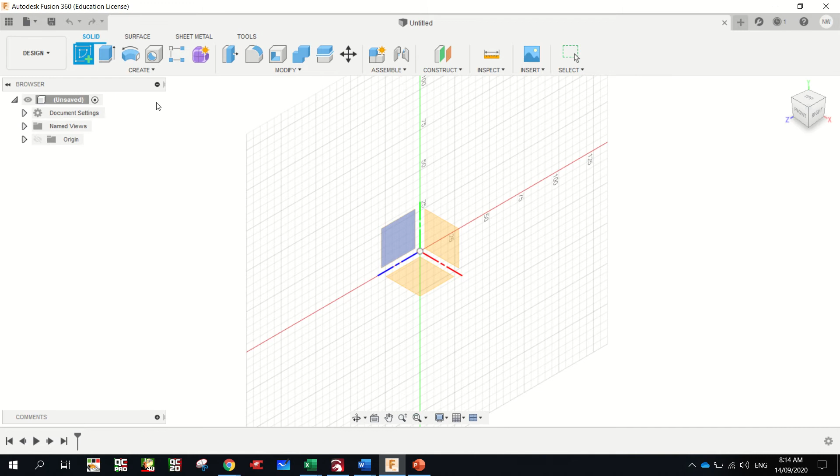So create sketch, we're going to draw it from the front view and draw the long piece first with the rectangle tool. So I've clicked it, click one point, just move your mouse, do not click and drag, and we're going to type in the dimensions. The highlighted one there says 26, but it's really 40, tab 650, enter. Okay, E on your keyboard. Just going to zoom out slightly to see this arrow and drag that out, and the thickness of our timber is 19 millimeters. Okay.

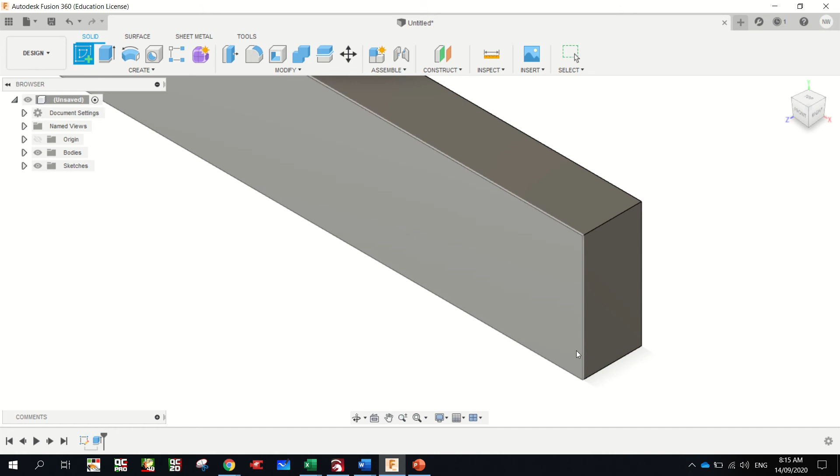Alright, now we're going to draw our finger joints on the ends. Just going to zoom in there. Now I'm using a scroll wheel on my mouse. If you have one, do that. If not, there's a zoom feature down here. Okay. So, sketch. This face here. Rectangle. Go up, and we're going up 10, tab 19, enter. Okay, E, and we'll drag that one off that way.

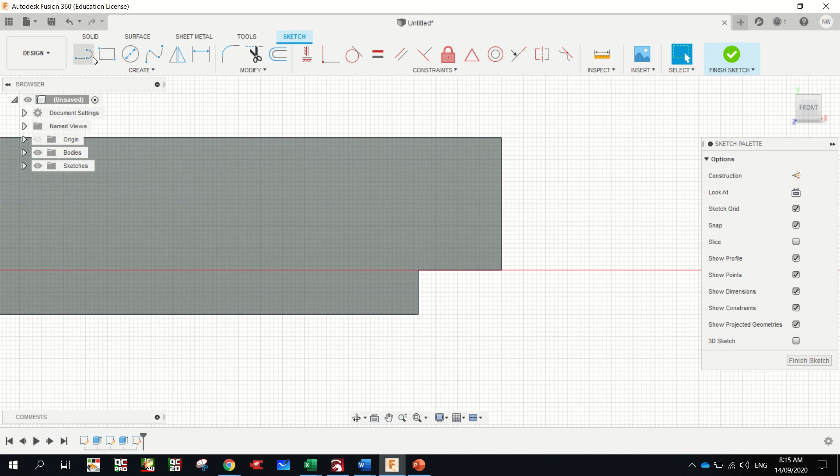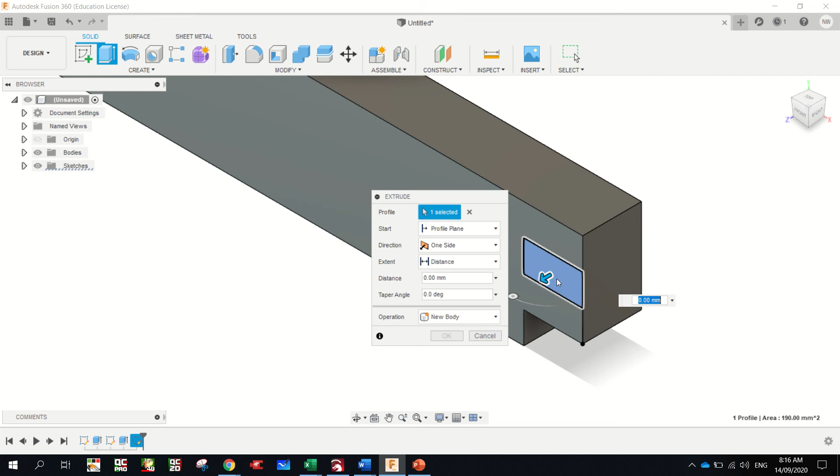Sketch this panel here. I'm just going to draw a line up here, 19, enter. Oops, not 19, sorry. Line up here, 10, enter. And I'll start drawing my rectangle from there. So I'm going to go up 10, tab 19, enter, extrude. So I selected it and then hit E, drag that back that way. There's the finger joints done already. Okay, same down this end.

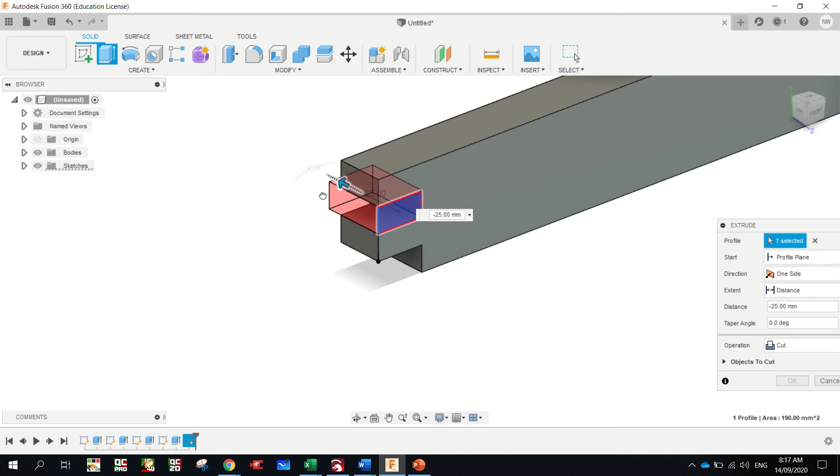Sketch this face here. I'm just going to zoom in a bit. Rectangle 10, tab 19, enter, select it, click E. Just going to spin the screen. You can just move that box out of the way, grab the arrow, drag back, enter. Sketch on that face there, line from the end point up 10, enter, rectangle from that point there, click, move that way up 10, tab across 19, enter, select it, click E, grab the arrow, move back, enter.

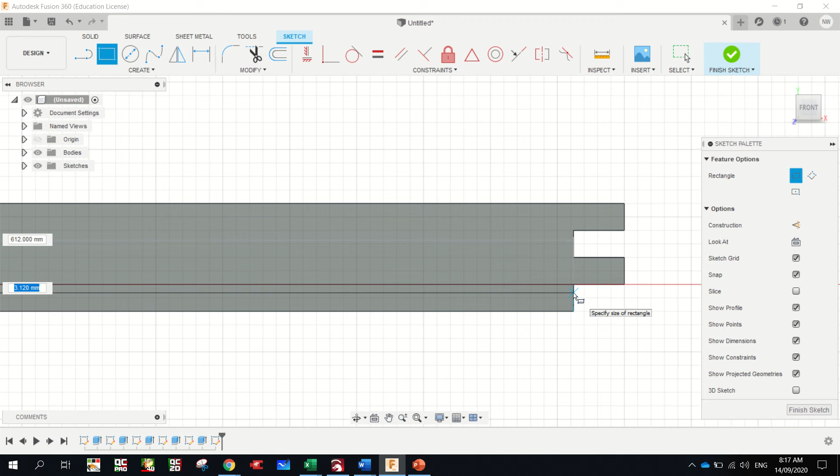Okay. The one thing that's missing here is our groove, so we'll draw that in. Sketch this face here. Now we're going to draw it from this point here. I'm going to zoom out. I'm going to go to that point there. So it's 612 by 4 millimeters. Enter. Select it, click E, spin your drawing, zoom out, grab the arrow, and it's 10 mil deep. Enter. Okay, that's that one piece done.

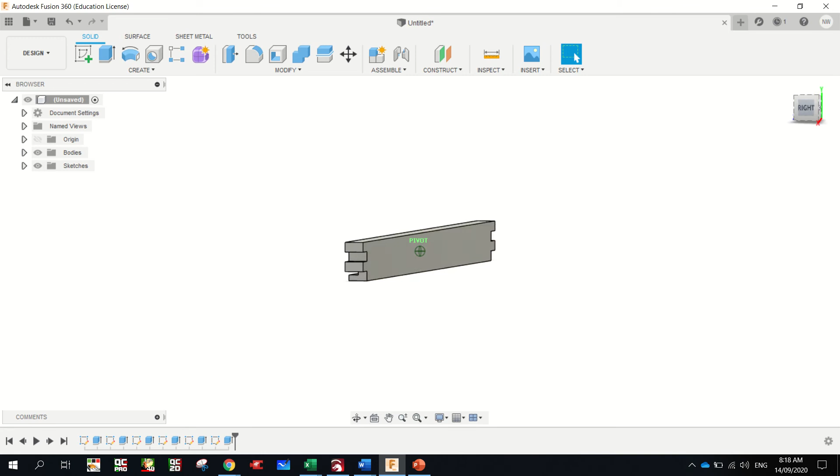Now you don't have to draw that again, we can copy it and mirror it. So to do that, right click. Actually, we don't have to do that. We can just select the whole thing. I believe it's in modify. Maybe not, maybe create. Here we go, mirror.

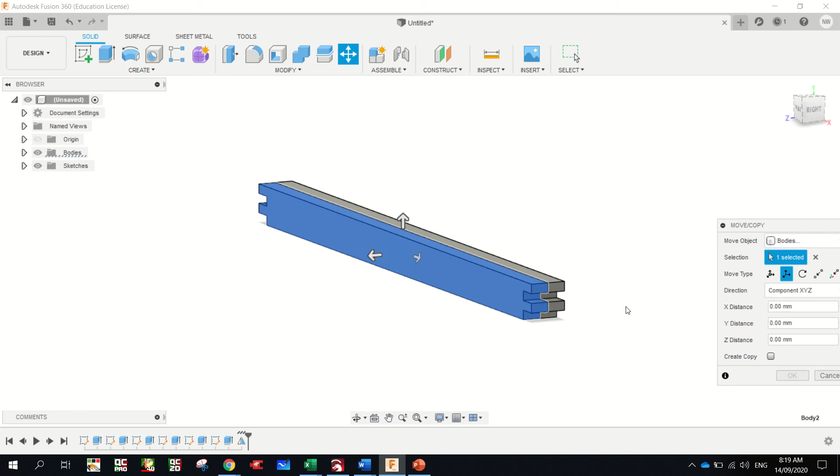Faces, we'll go bodies, this body, object selected, the mirror plane, select this one, click OK, right click, move copy, bodies, this one, we're just going to translate, which means to slide across. You'll learn that in maths last year. And grab that arrow, we'll move him that way. Go a bit further. Okay. And we spin that, and you'll see it's got the groove on the inside. Okay.

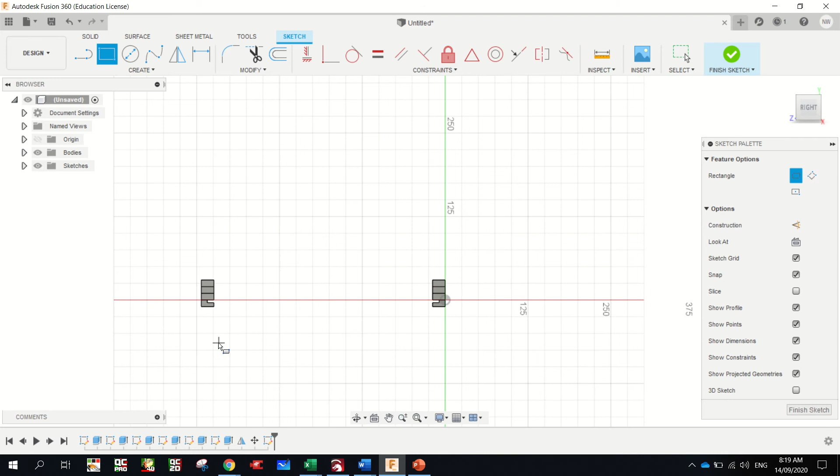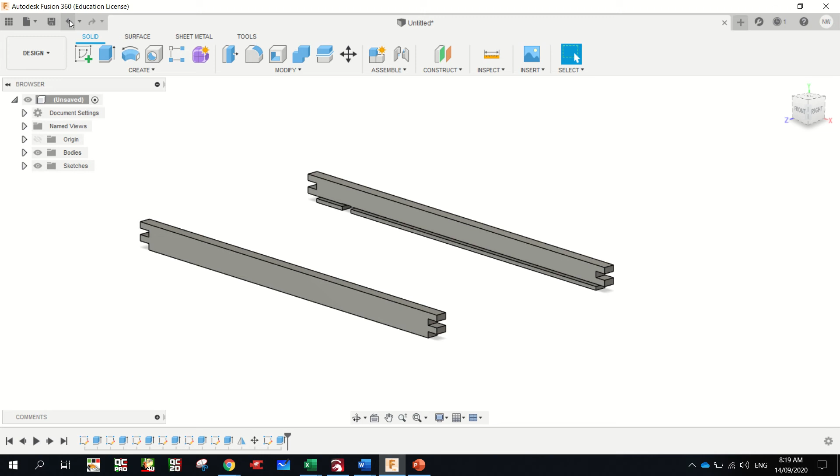Sketch from the side view, so we're going to do the ends. Just going to draw it down here. It's 65 mil high, tab, 350 long, enter, E for extrude, and 19 thick. I might have to do this again, just see. Yep, it was in my drawing. Okay, here we go. Rectangle, I'll just draw him out here, be safe, move it later. 65, tab, 350, enter, E, 19, enter, there we go.

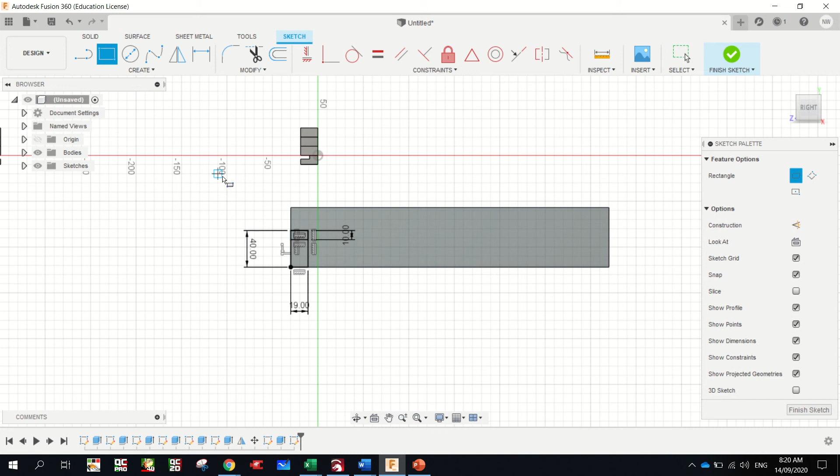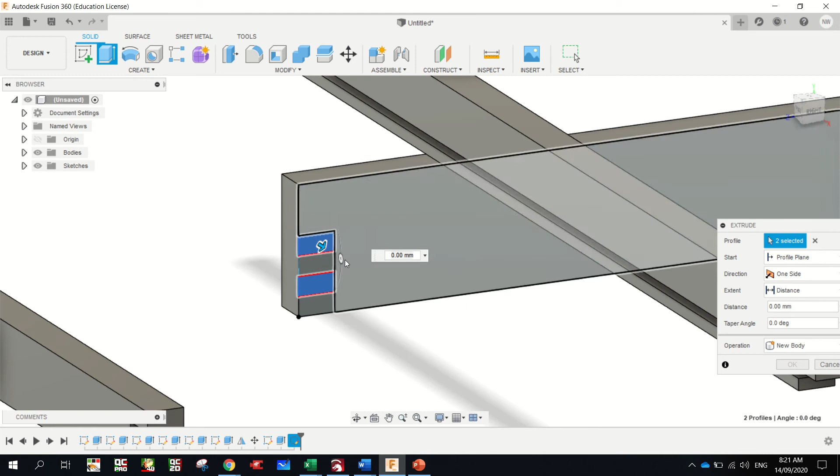Okay, so let's sketch our finger joints on here now. Going to be tricky. We're going to go 40, tab, 19, enter. From here down, 10, enter. Oh, rectangle. Zoom in a bit. From there, yep, and there, 10, enter. Now on the other one, we took out that one and that one, so on this one it has to be the opposite, that one and that one. So I held shift to select those two, and I'm clicking E. I spin my screen, I can drag those out, enter.

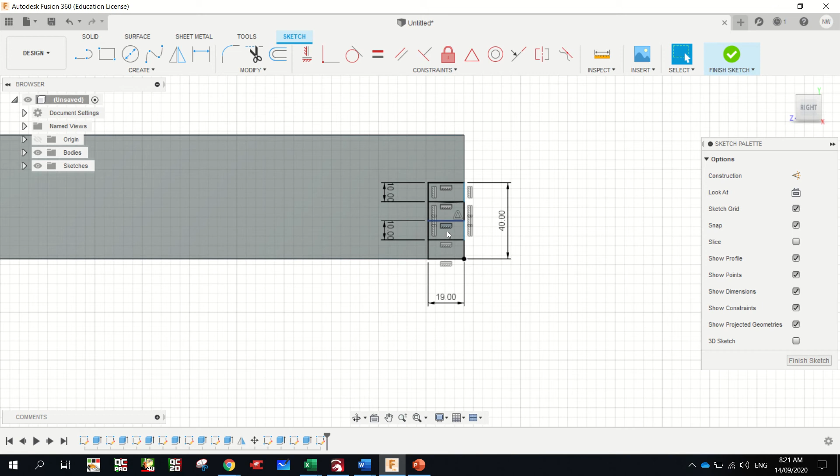Okay, I'm going to do the same down the other end. Rectangle, I'm going to go up 40, tab, 19, enter. Rectangle, 10, 10, 10, select that one, hold shift, select that one, click E. Sometimes it spins the screen for me, sometimes it doesn't. Grab the arrow, drag that back, enter.

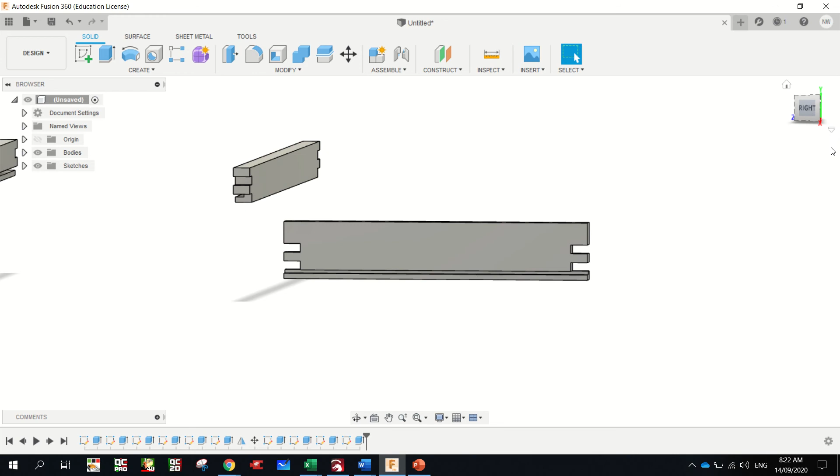I'm going to draw the groove in to match. And this time our groove starts all the way over here. So 350, tab, 4, enter. So I'm going to zoom in and get that, click E, drag that back, 10, enter. Okay. Now our last thing, well, not quite last thing.

I'm going to go up 10, enter. Line, up 10, enter. Now we're going to go into create, I'm going to get an arc, and I'm going to get a 3-point arc.

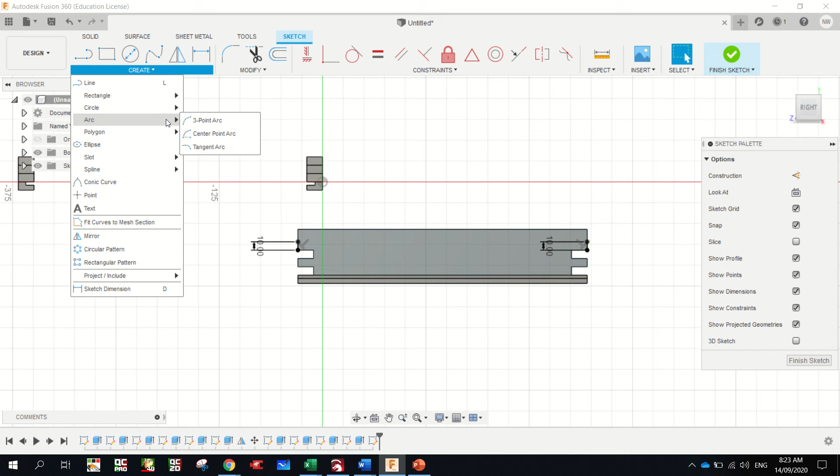Creates an arc using 3 points: select the start point, the end point, and then the point on the arc. So start, end, and then the top middle. I'm going to start it here, end it there, and there's my top middle. Now see how that triangle symbol comes up? It tells you you're in the middle of this whole line. Okay, there it is. Click.

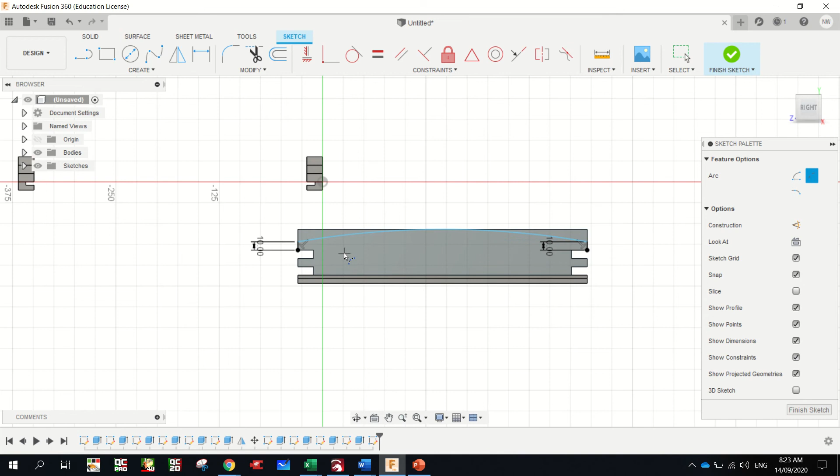Escape on your keyboard, and we're going to get rid of that one. Hold shift, that one. Spin it. Click E. Done.

And the last thing we need in here is a handle. Now we're going to do a little bit of construction work to do this. Just zoom in a bit. I'm going to draw a line from here to here. Okay, there's my midpoint, just drawing a line up there.

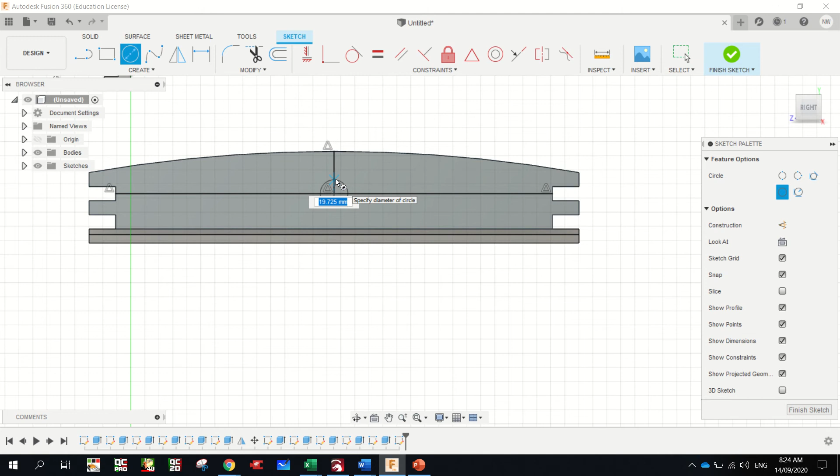And I'm going to get a circle tool, center diameter. We're going to do 19 millimeters, enter. Okay, now we've got that first one.

Now we're going to draw a line across, 25 millimeters, enter. That won't work. Might work, let's have a look. No, my mistake. From here, a line across to there is 9.5.

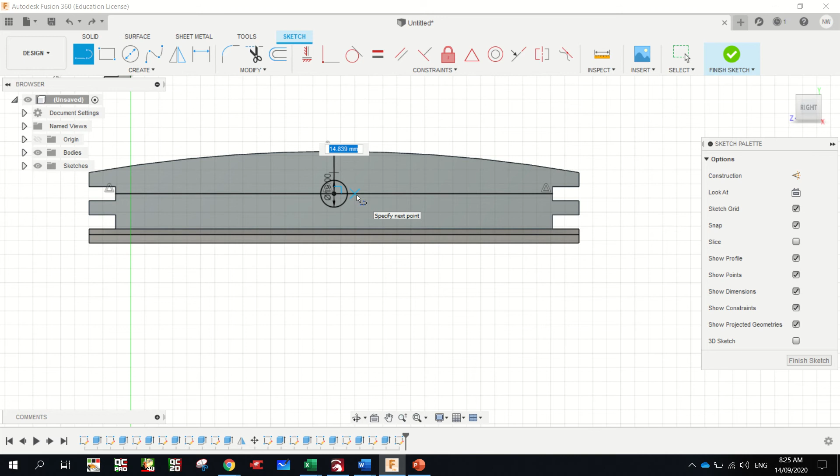I'm going to go across 14. Now let's just make it 15, a bit easier. Okay. And then a 19 mil circle. One more. Line from the center of this circle, out 15, gives us our new center.

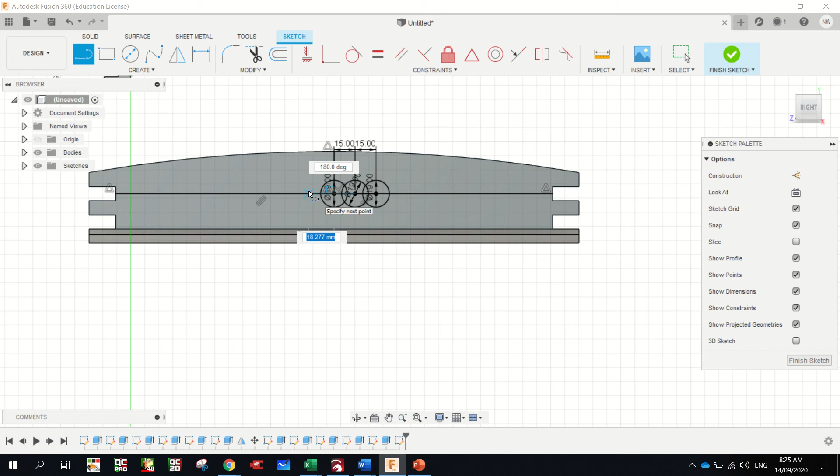And we're going to go up, or out, for a diameter of 19. We're going to do the same thing this way, 15 mil. Diameter of 19.

And one more, 15, it's our new center. And diameter of 19. Enter. 1, 2, 3, 4, 5. That's plenty, all centered. I'm going to click that line and click delete.

Now you can hit the T button on your keyboard for trim, and you can trim off the inside lines here that we don't need. They turn red as a preview. Make sure you don't delete the wrong one. So if I go, ooh, I don't—you can still make sure you get the right one.

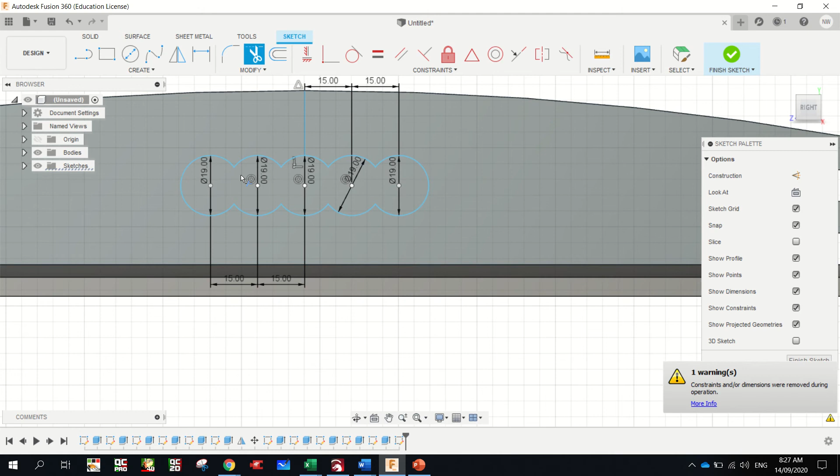Okay, escape to turn that tool off. I'm going to click that shape and click E. Spin my drawing, grab the arrow, delete it. There we go, there's our handle.

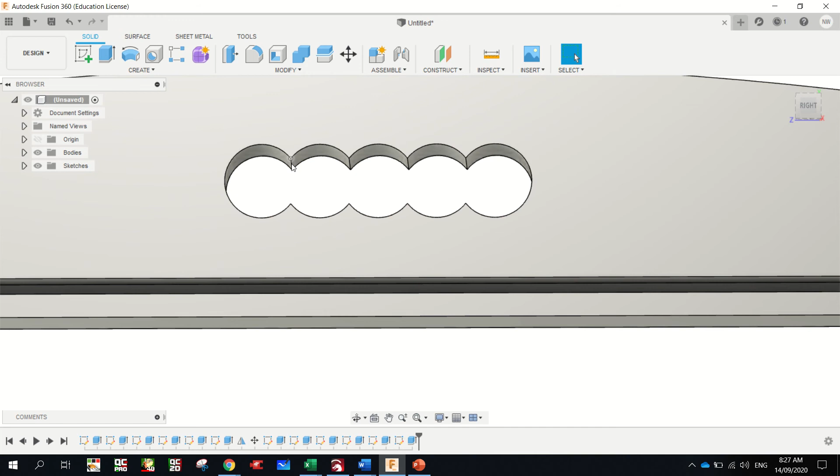Now if you want to be super good, we wouldn't leave these as sharp edges. So I'm going to zoom right in. I can shift and multi-select, so I'll just do the top ones first. Click F on your keyboard for fillet.

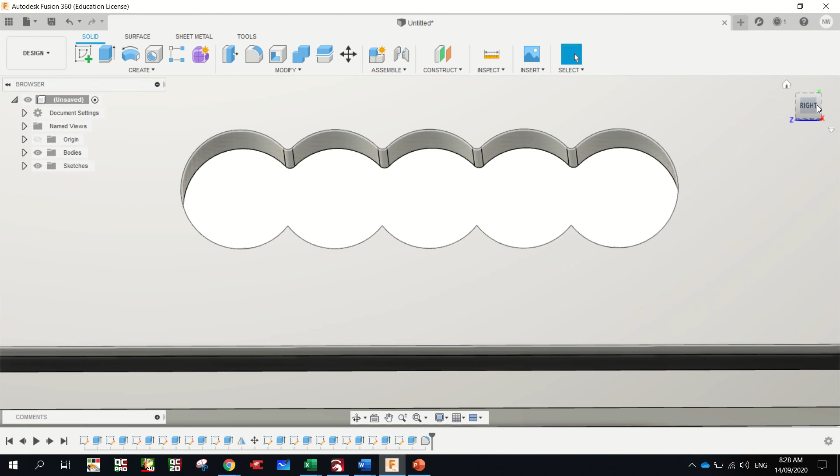And this arrow appears and you can drag that back. And we're dragging that back 1 millimeter. Click OK, looks a bit nicer. Do the bottom ones.

I'll show you what a larger fillet would look like. Whoops, hold shift. F. See, that's a fillet of 3 mil. That doesn't look too bad either. But I'll just leave it at 1 so it's symmetrical. And click OK. Okay, that's that end done.

So same as before, we're just going to mirror this one. Create, mirror, not faces, we want the whole body. It's that object. Mirror plane, that one, okay. Select, move copy, the whole body.

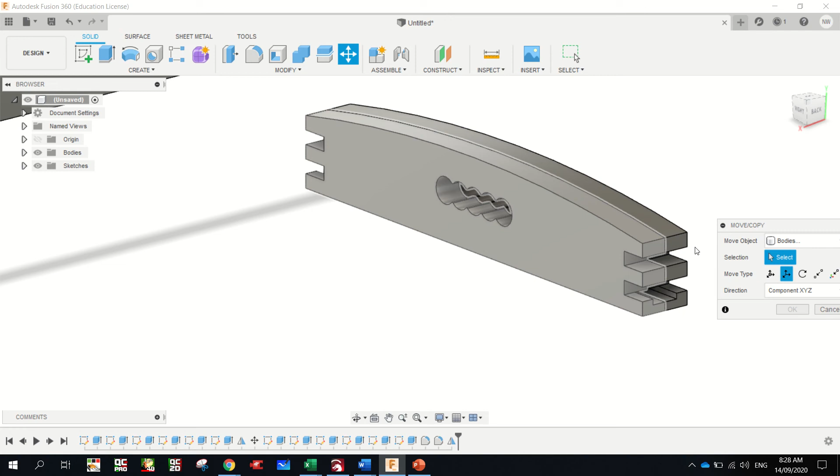Yeah, we're going to translate it. Oops, selection, that one. And move type, translate. Grab that arrow, slide it that way. Click OK. Alrighty.

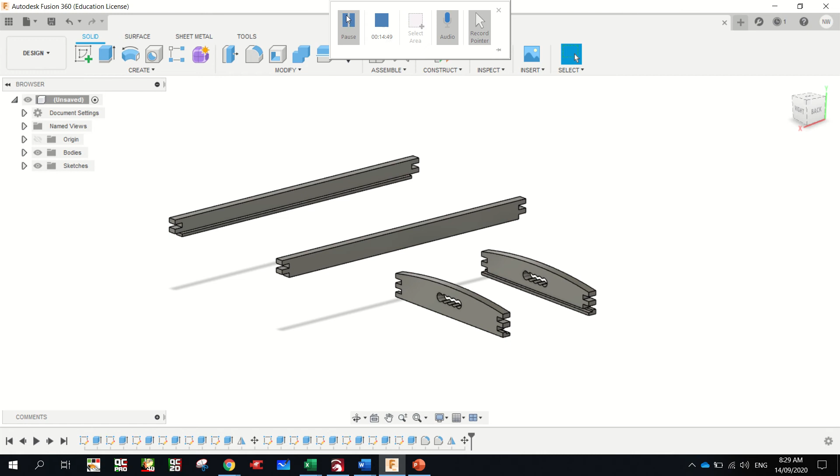There's one last thing to do, our base. So we've just got to work out some numbers. Okay, sketch, we're going to draw it from the top view. Rectangle, I'll just draw it out here, move it later. Now it should be 330, tab, 630, enter, E for extrude.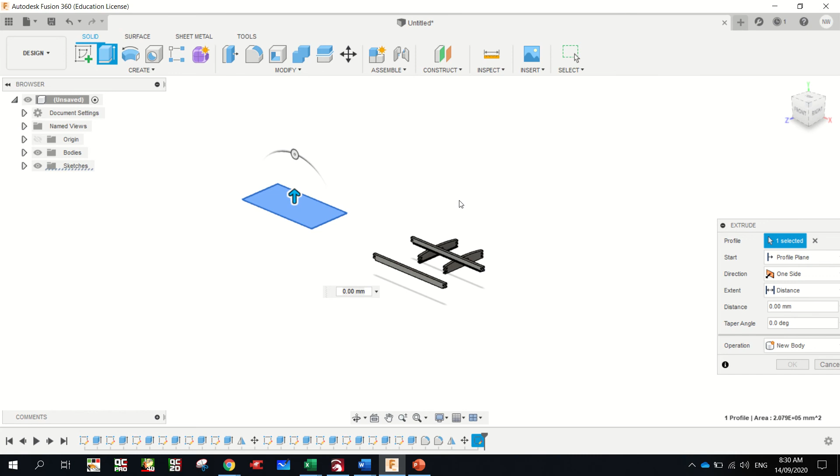Spin your drawing so you can see it, and we're going to make that 4 mil. Enter, that's our ply base. Okay, now we've got all our pieces drawn now.

We're going to come to our bodies folder. There they are there. I'm going to right click on the heading of bodies and go create components from bodies. Okay, now they're all components.

That's good so that when we draw our orthogonal drawings in our set of working drawings, we can export them piece at a time. If you forget to do that component step, you won't be able to produce your set of working drawings, which is a bit of a problem because I will tell you to start again. Okay, so please don't forget that.

All right, we're going to start putting this together. So I'm going to start, I think, by putting the base in one of these pieces. So right click, move copy, component, tells us the selection, want that one.

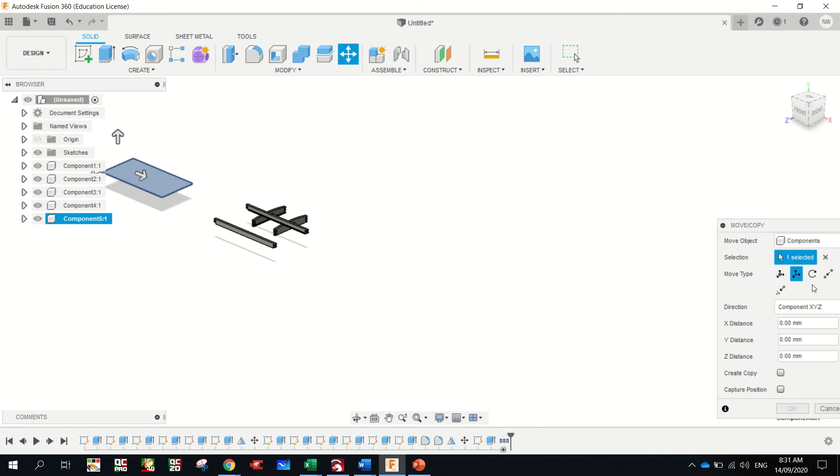I'm going to this time go point to point, origin point. Okay, now I know that I want to line it up with that bottom corner there, so I need to get the back bottom corner of it over here.

That one, alright, so it's saying it's selected. Now it wants our target point. I'm going to put that there and click OK.

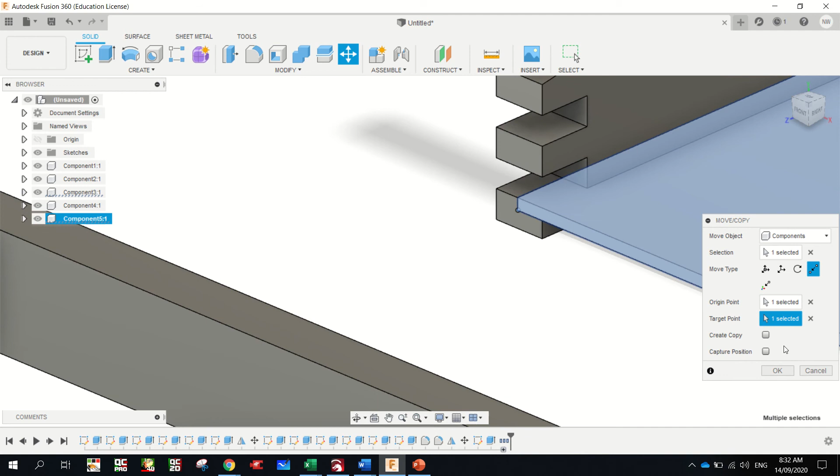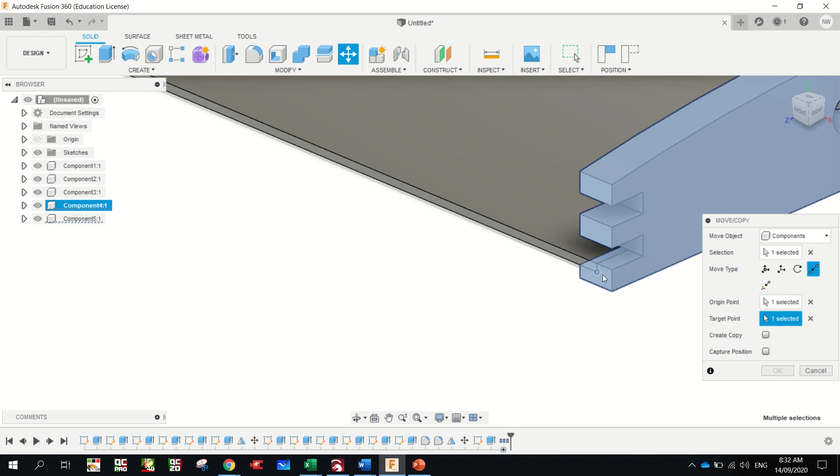Alright, now I'm going to move this end out to the end of it. Move copy, component, that one, move type point to point, origin point. Want that one, target point, that one, click OK. Okay, same here.

Right click, move copy, component, that one, it's point to point, origin point. I think I might line it up with that point there, which should be this point here. So I'm going to go from here to there. Click OK. Yep, looks good.

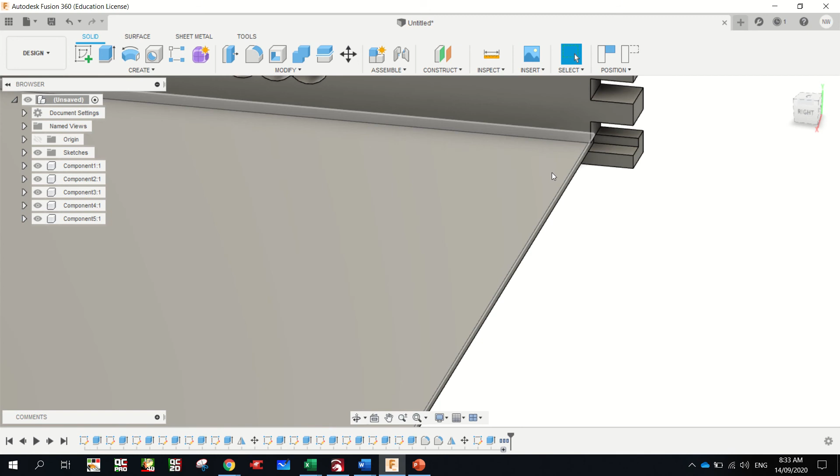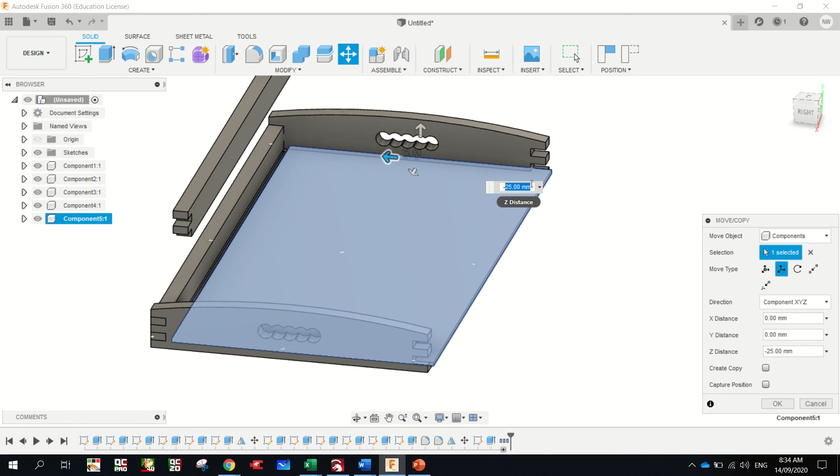I need to move this base across a bit by 10 mil. Okay, we can easily do that. Right click, move copy, component. This time just do a translate. Not 25 mil, we just want 10. Minus 10. That's better. Now it's actually in the groove, not through the other piece of timber.

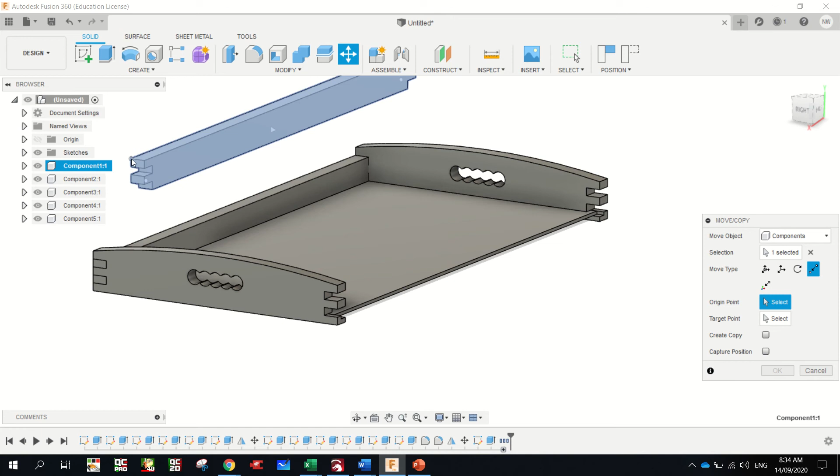Yep, that's better. Okay, right click, move copy on this one. We want the component, the whole thing, point to point, and I think I'll line up, I'll go for this one this time, there to there. Click OK.

Alright, home. There's our carry tray. Something doesn't look right here.

Right click, move copy, component, origin point, there to there. Okay, I'll just check each one. Yeah, that looks good.

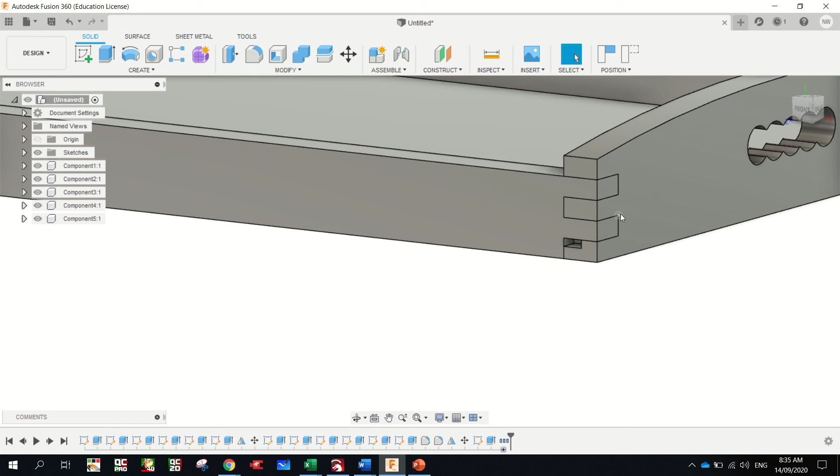Whoops. Is that one? Yeah, I must have just got my target points wrong before. There we go.

Now you can see a little cavity here. That's fine, it's a very, very tiny little cavity from the groove. See, that's as far back as it goes. We'll just put some putty in there when we make it.

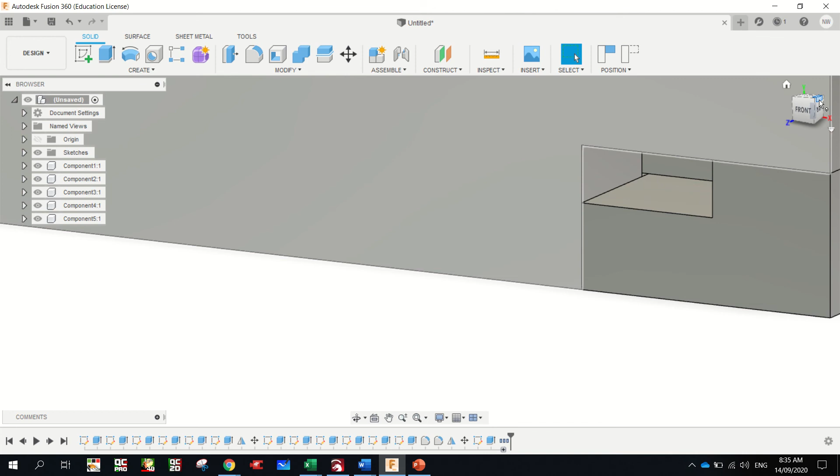Okay, now we're going to put an appearance on this. So select the whole thing, click A on your keyboard. There we go, appearance tool pops up. Now if you scroll down in your library, you'll have a wood folder, and you can grab the pine one and throw it on. Click close.

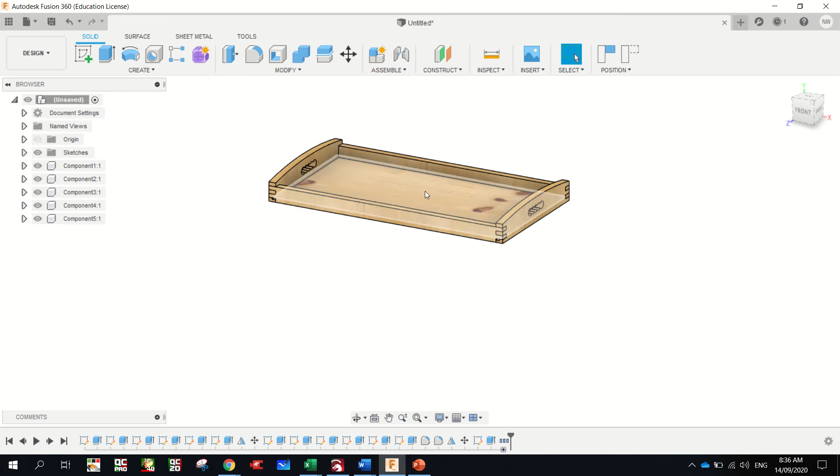There's your carry tray. Okay, I'm going to save it. 2020. Carry tray.

And now we want to create our orthogonal drawing from that. So we'll go File, New Drawing, from Design. We'll go full assembly to start with. Create new from scratch, ISO A4. Want it to be the second A4 one. 297 by 210, same numbers back to front, so it's saying do you want a portrait or landscape, and we want a landscape. Click OK.

It'll open up a new tab. Here we go, it's loading, loading, loading. Okay. Place base view, so click. And now over here in your drawing view, we're going to change that to 1 to 5. Great, we're going to make it visible and hidden edge so we can see our joinery, and click OK.

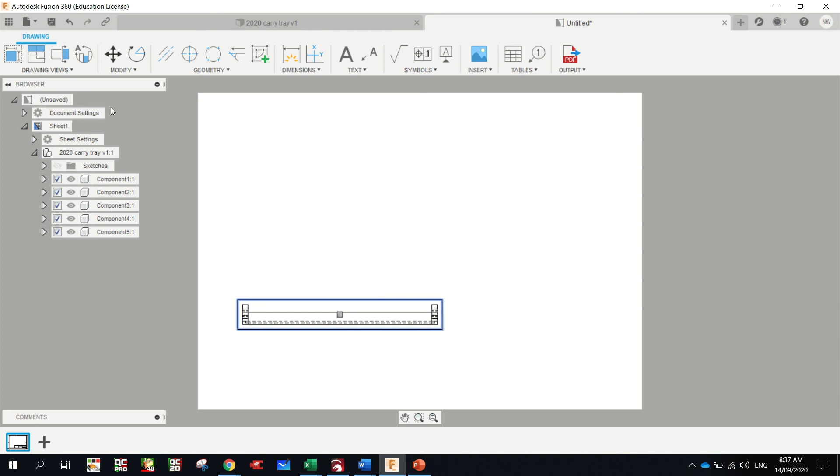There we go. Now, I don't want the title block, we're not doing graphics, so I don't care about it. Click, and then I can grab that grey box and just move it down a bit. Done. Now click, you can get projected view.

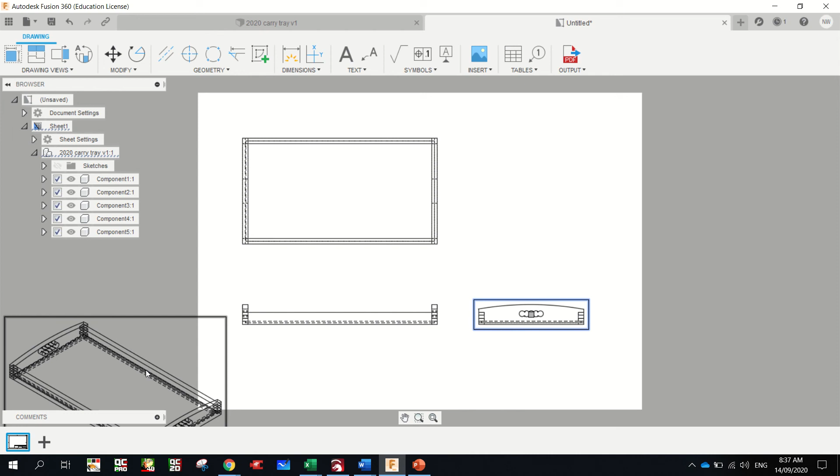That one, that one, that one, escape. And now I can just move these up. That one, drag it from that grey box over there. And that one, I want to fit there, so I just have to move this one over. I have to move this one first because it was the parent, yeah.

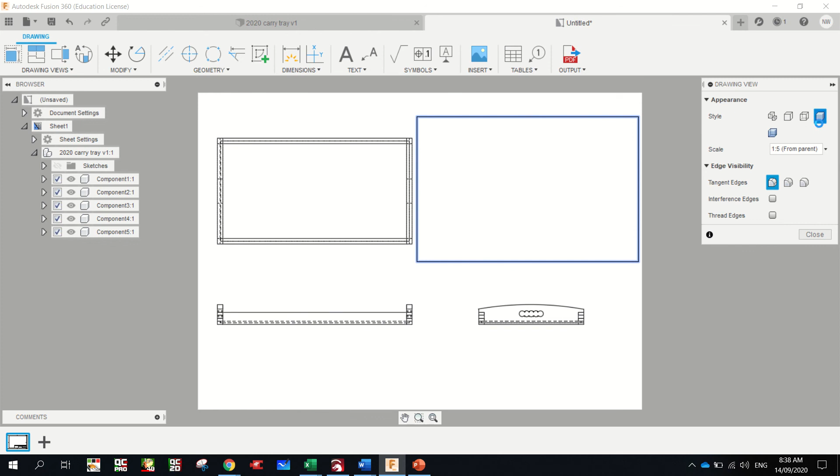Okay, now I'm just going to double click on this one to open up the drawing view for it, and that one I just want shaded without the hidden detail. Hit close. Okay, time to dimension.

So dimensions, I'm going to zoom in on this section here, from there to there, click. Zoom in on this one, our end piece there to there, align it with that one, click.

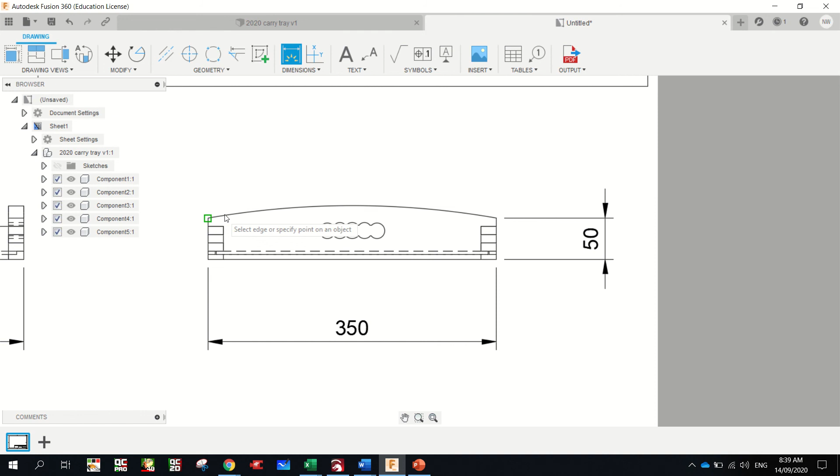Here to here, 50, but from here, might have to go from here. That's all right. We can do it from here. Here, 65. We'll do it on the outside though.

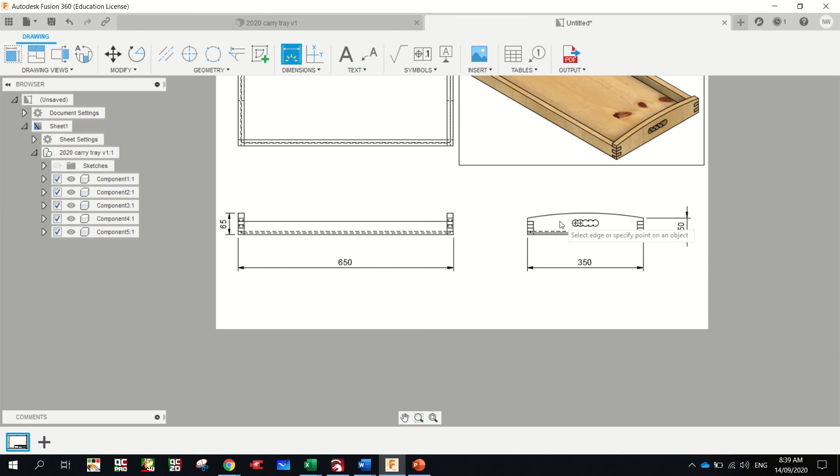Dimension from here to here, 65. And if we followed that line the whole way across, it'd line up with that point there. So that's how we'd know that at the peak of that curve, the width of that timber is 65 mil.

Okay, we'll draw in our thickness of timber. We can do that at the top here. So all our timber is 19 mil thick.

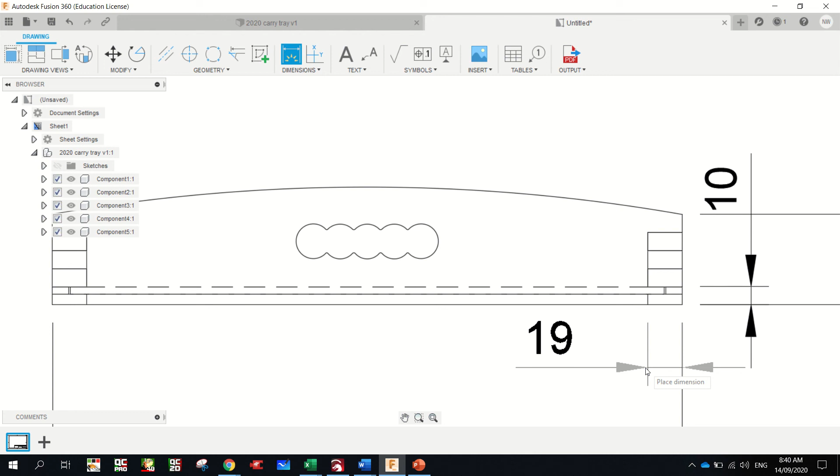And we need to do our finger joints, so we can get each finger joint is 10 mil thick by 19. Okay, our handle.

It's another way you can do this. Go dimensions, diameter, 19. Same for all of them. And they've got 15mm distance between centres, and we can just write that text in.

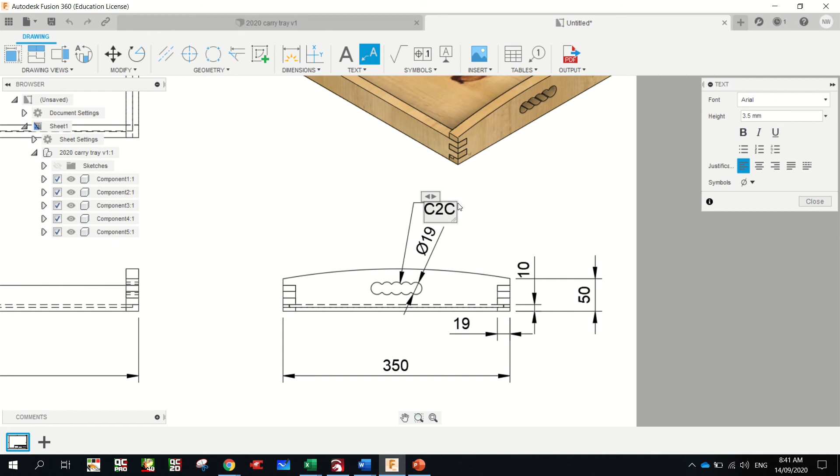From the centre, the next, or we can go centre to centre. Centre to centre, that's what that means, 15mm.

Okay, and dimension. There we go. So go up 35 and across, gives us the centre line that way for all our circles.

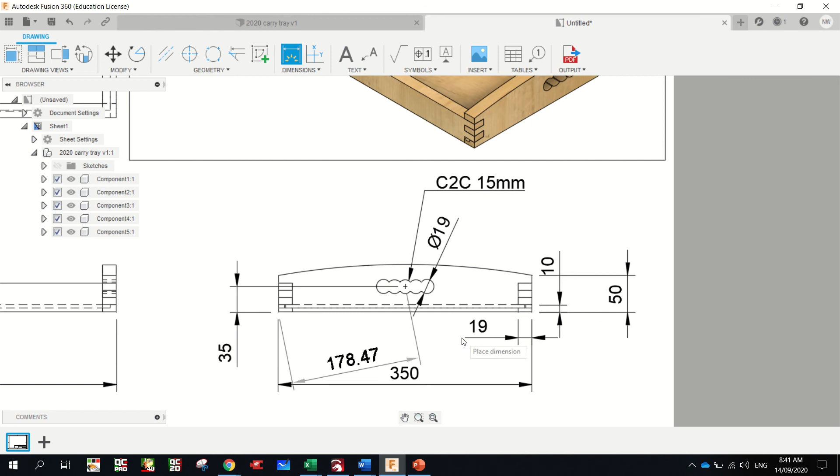It's not playing nice. There we go. Zoom in a bit, you get more control. Okay, so 175 and 35 up, where those two points intersect gives you the center of the first circle, then 15mm to there for the next one, 15mm to there for the next one. We know that from that marking there.

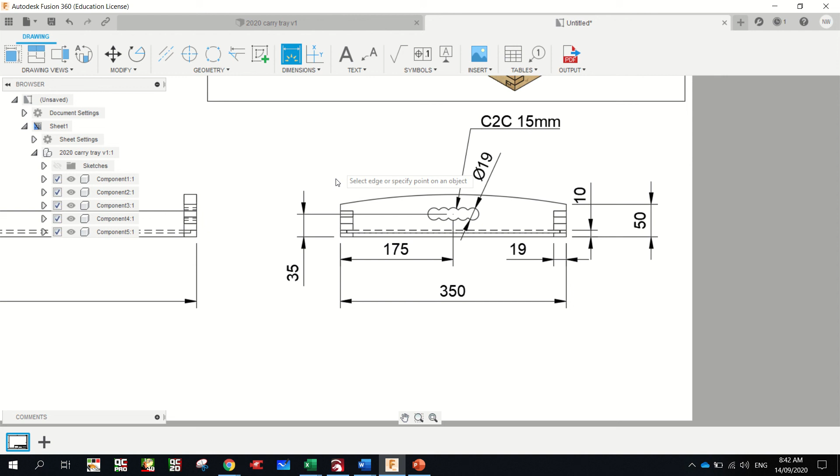Okay, so do we have enough information to make that bit of timber? 350 by 65, yep. Each one's up 10 in 19, yep. Our groove, I put the groove in it for you already, so we won't worry about dimensioning that. 65.

And I think on the top we'll dimension the inner size of our carry tray. So he ends up on the inside being 612 by 312.

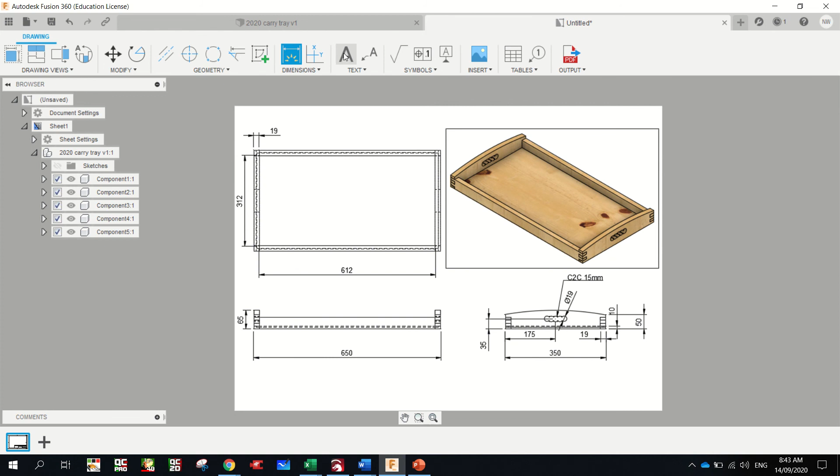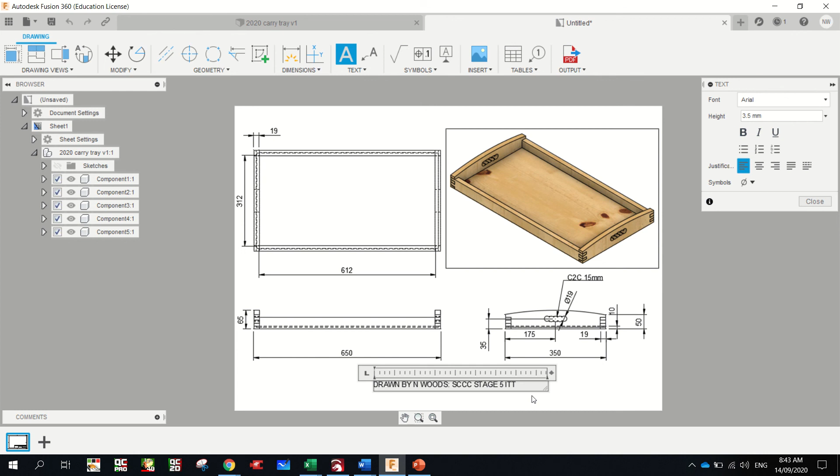Okay, last but not least, text. Down the bottom, put your name, drawn by N Woods, SCCC, Stage 5, Industrial Technology Timber, 2020. Done. Okay. Save it.

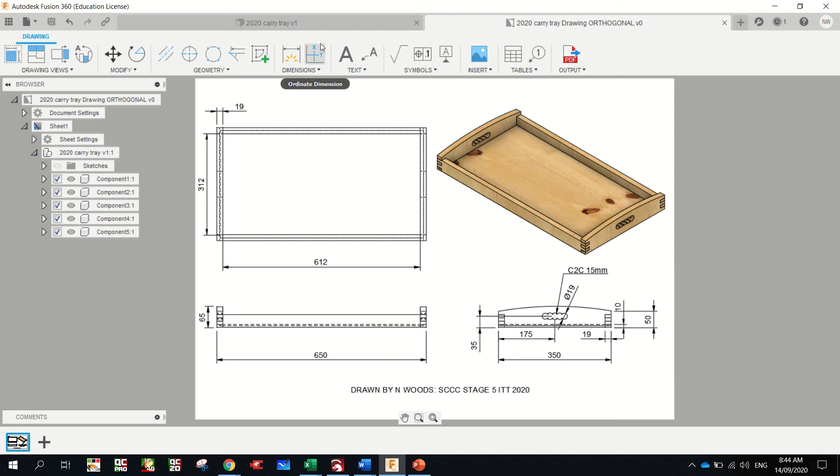2020 carry tray drawing. This is your orthogonal, and orthogonal means top, front and side view drawing. Save. And you'll be able to take a screenshot of that and put it in your carry tray folio for your CAD drawings. Now we've got one more drawing to produce.

Okay, file, new drawing from design. It's not a full assembly this time. I'm going to select the parts, component, this one. Yep. It's going to create a new sheet, that's fine. And it's the second one.

Alright, so what you can see now, it's opened up our previous drawing, but down here it's like PowerPoint, it's creating slides, or in this case, sheets. So sheet 1, sheet 2. So I'm going to place this, I'm going to make it 1 to 5 scale, visible, okay.

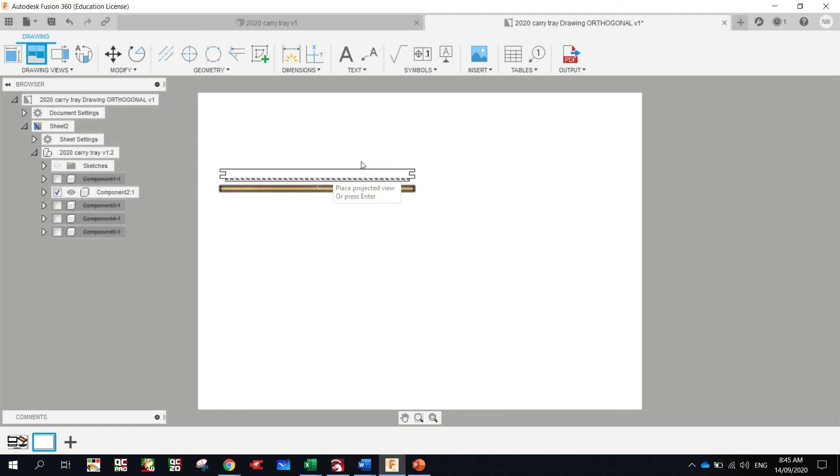And we know that's how we have to cut out that piece there on our timber. Select it, get our parent view. Okay, escape. We can dimension that. Oops, that only got to the groove.

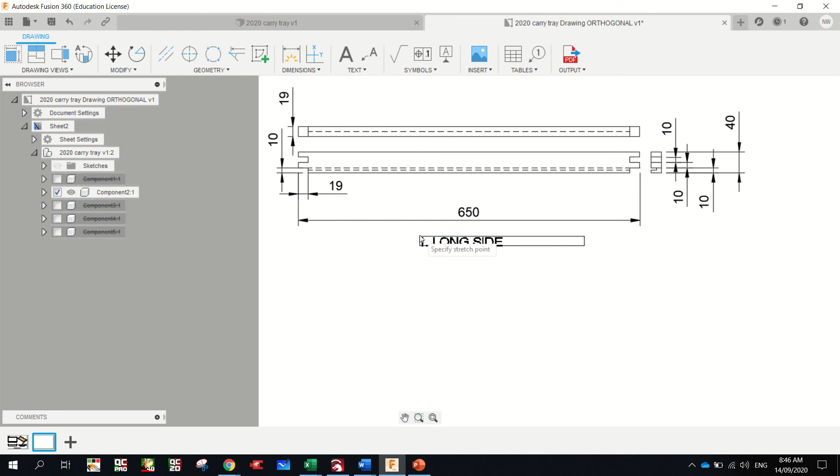Okay, piece 1, long side, done. Just move that. Short side. Save.

Okay, back to the original. File, new drawing, from design. Select, I want that piece there. It's not going to a new drawing, it's going to our orthogonal, but it's going to sheet number 3. Click OK. Okay.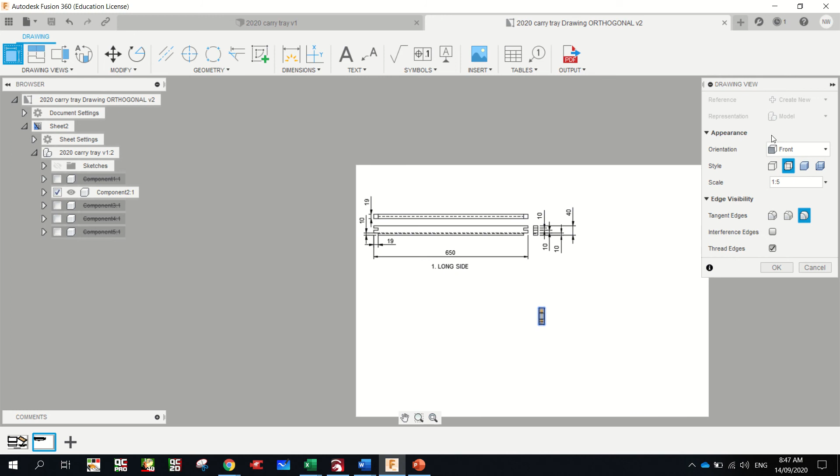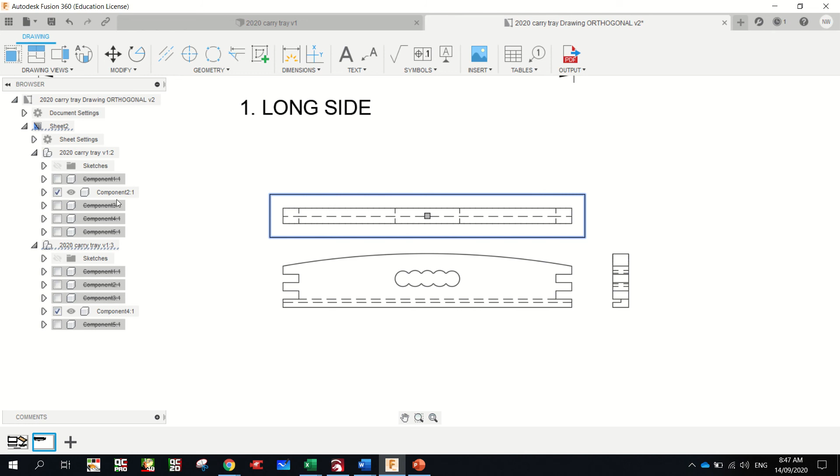1 to 5, parent view. Escape. And now I want a parent view of that one. Oopsies. There we go. I'm just going to move that one up above it. Dimensioning time.

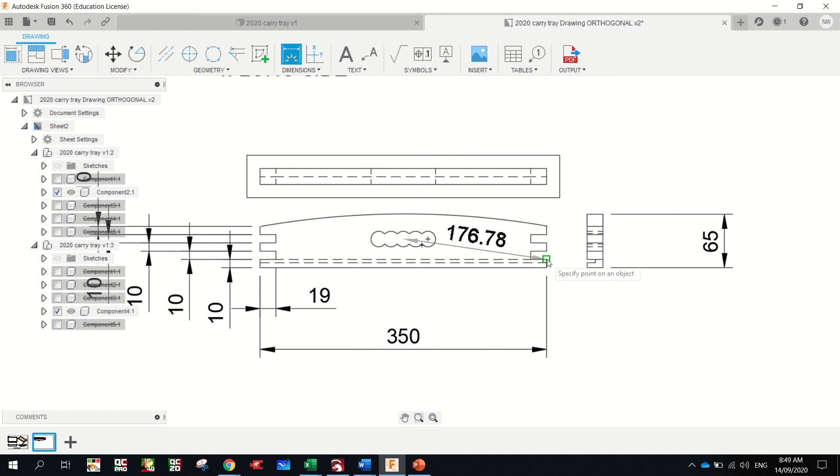Okay. Same for the other end. Dimension that point there to that point there, but going that way. And that point there to that point there.

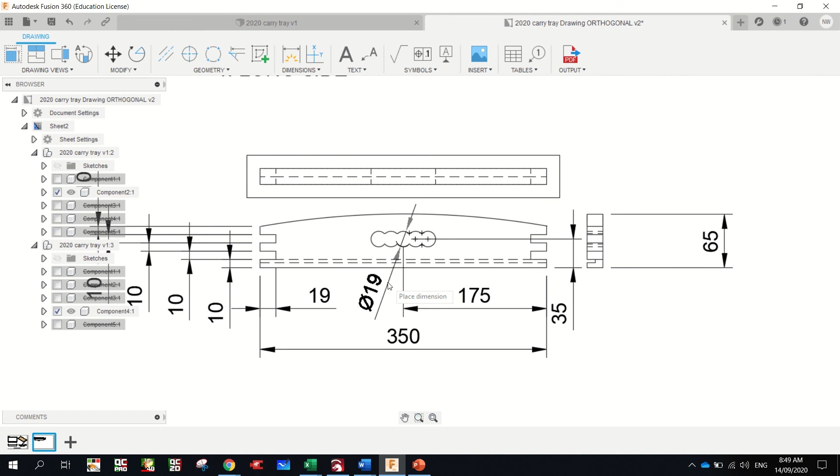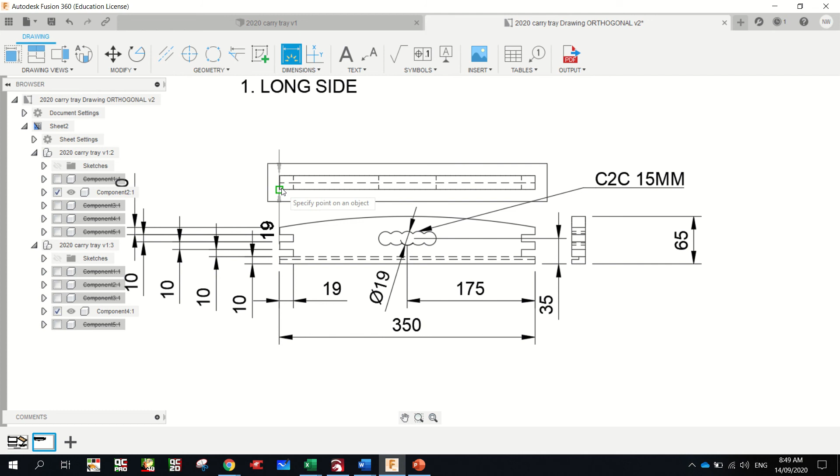And we know center to center. Thickness of our timber. Oh, it's a bit messy. Go the other way, start from that point, go up.

Width of our handle, 79 mil. That should be enough. Yep, fits my head.

And now we've just got the base to go. We'll put a dimensional add label on that one. 5, 2,

Short side. Now the reason we number these guys is when you go to your folio, whenever you're creating a cutting or materials list, yeah, that's a key. So the one long side here will be one long side in your cutting list, materials list, finance plan.

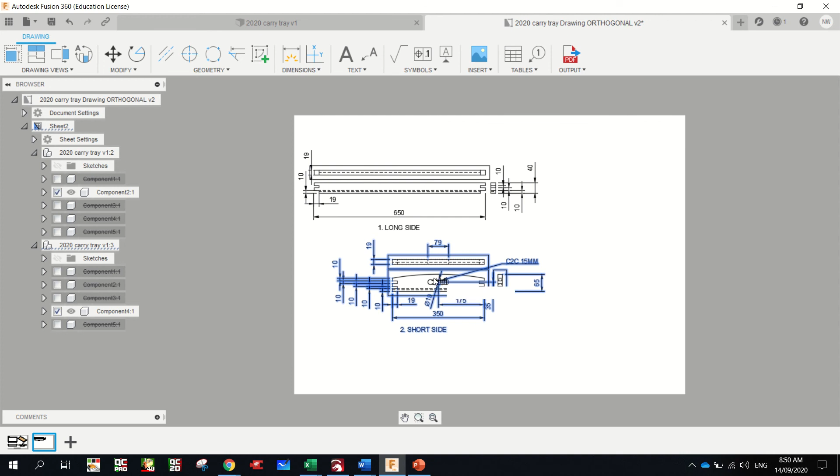They'll all match up. Now I might just make some space. Ooh, that did not like that. Undo. Oh, that's right, I remember. Move. That's better.

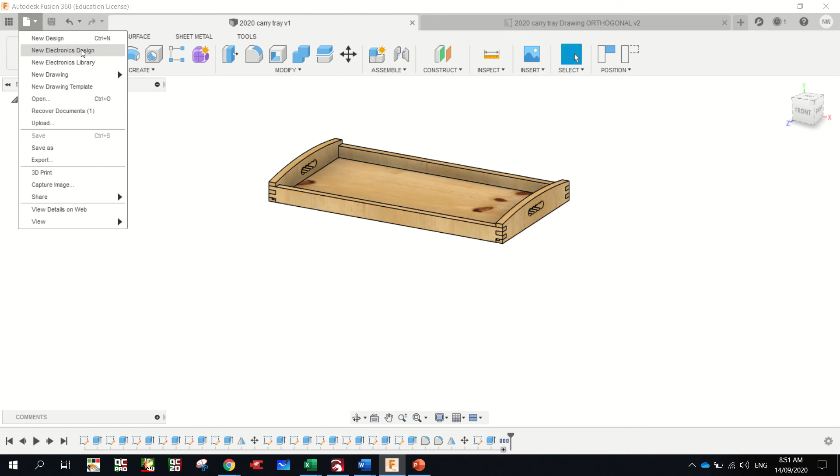Okay. One more piece, let's just hit save. Back to here. File, new drawing, from design. Select just the base. Drawing, orthogonal, sheet set, number 2.

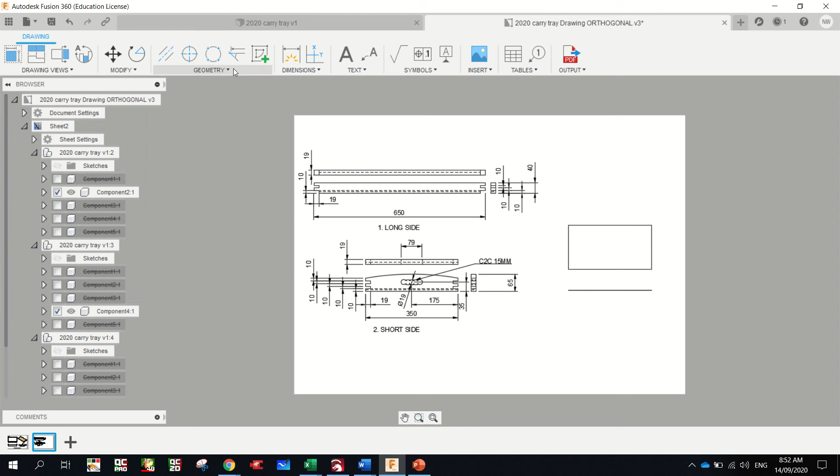What's going on here? Sheet 2, there we go. We go. Yep. Dimension.

All right, now these numbers, we measured our internal dimension to be, I think it was 612. What's on the other sheet? 612 by 312, I think it was. So if we add 20 to each of those.

Yep. So mathematically, if we added 20 to each of those internal dimensions of 612 by 312, we'd end up with the short side would be 332, and this is 2 mils shorter, so that's good because it gives a little room for error and a bit of room for the glue and for swelling, so that's good.

And the 612, add 20, you'd get 632. So we cut this board 2 mil shorter. Again, fits in nice and easy and gives the glue and the timber a little bit of room to swell into shape. Okay, so that's really good.

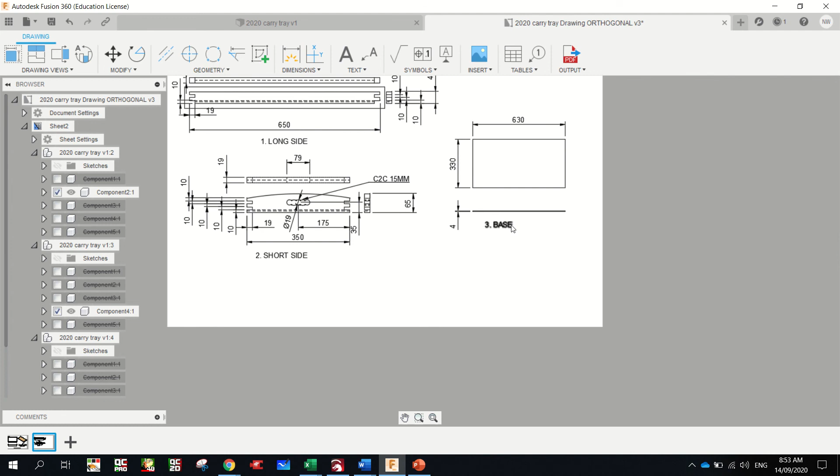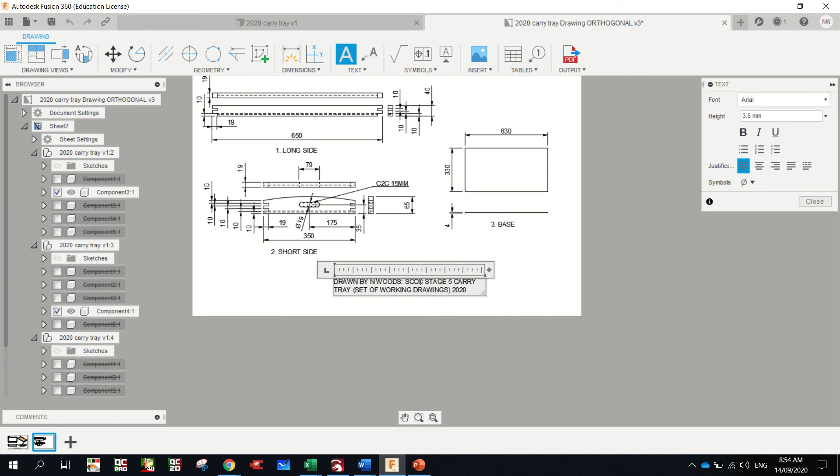So text, piece 3, base, done. Just move that over. Text, drawn by N Woods, put your name in there. Drawn by N Woods, SCCC, Stage 5 Carry Tray, Set of Working Drawings 2020.

Done. Save. Okay. And you'll be able to take a screenshot of that and put into your folio.